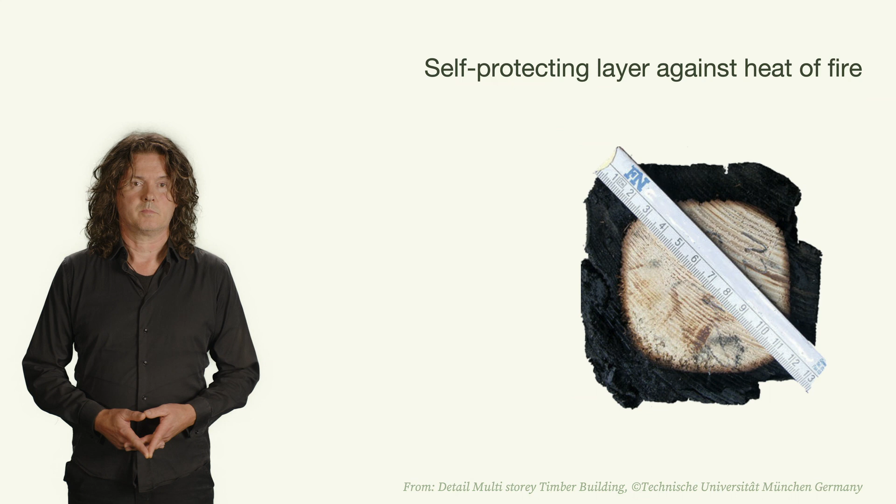Burned timber surfaces had a surprising advantage in the outdoors. In Japan, the method of charring boards called Shou Sugi Ban has been used for centuries to improve the weather resistance of timber facades.

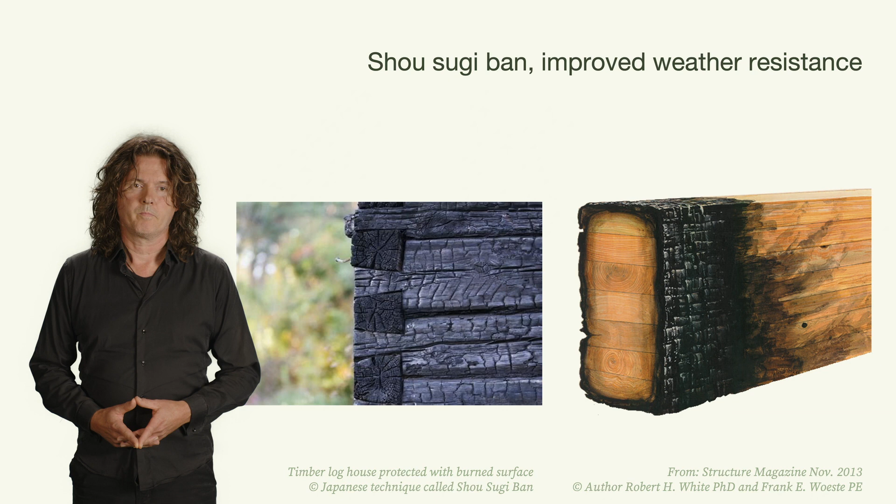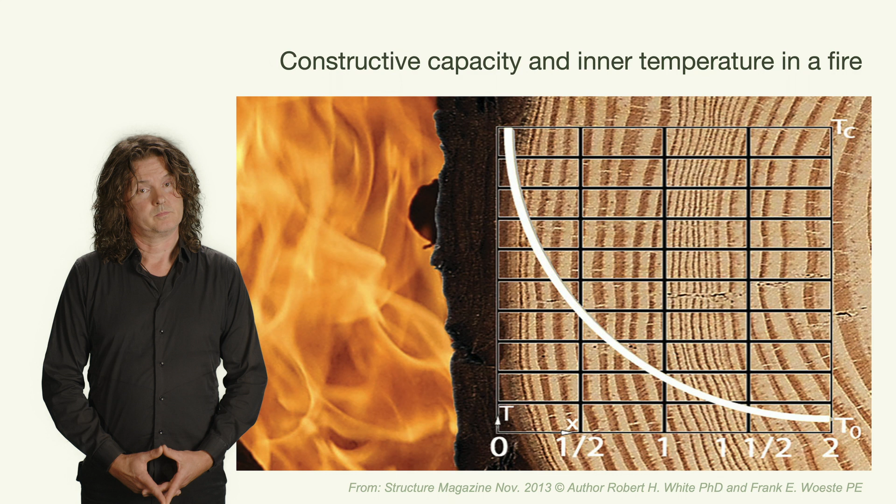In a fire, the layers behind the charred layer retain their constructive capacity completely. The inner temperature of the burning mass timber component remains at a moderate temperature. Mass timber construction systems are very predictable in instances of fire. The burn-in speed of softwood is 0.7 millimeters per minute. So by oversizing a structural beam or floor, a fire resistance of up to 120 minutes can be realized.

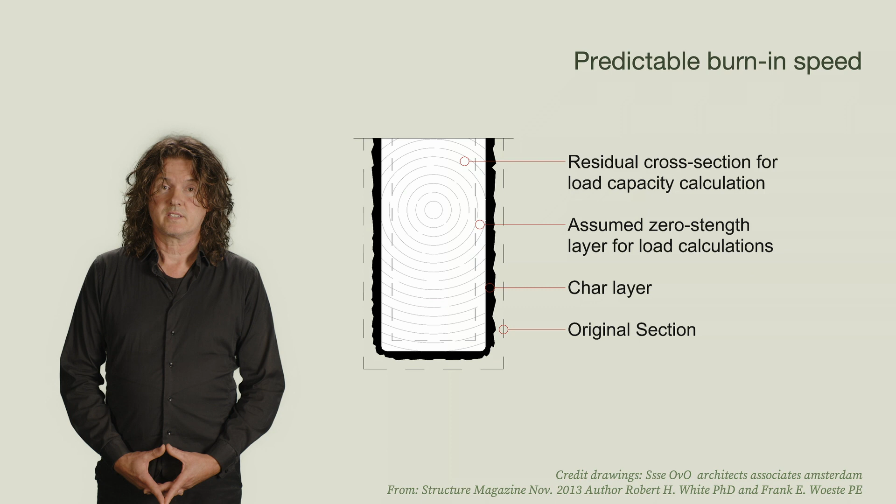In this fire test, various insulation materials were tested. The flame of each burner reached a temperature of over 1,000 degrees on the materials in the mock-up, being a plasterboard underneath the respective 10 centimeter thick insulation materials. From left to right, cellulose, styrofoam, glass wool and rock wool.

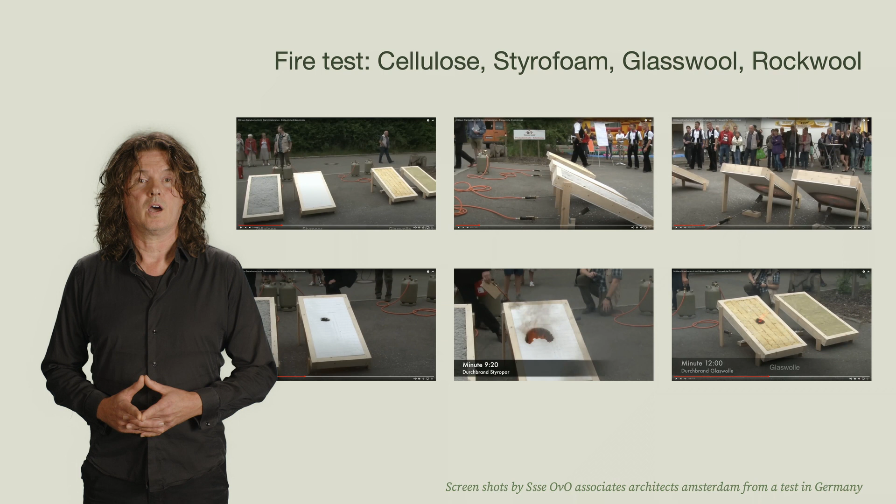For the styrofoam, the burn-through took just 9 minutes and 20 seconds. There was dripping of molten plastic and toxic fumes. With the glass wool, after a total of 12 minutes, the flames pushed through upwards. With rock wool, the burn-through took 18 minutes.

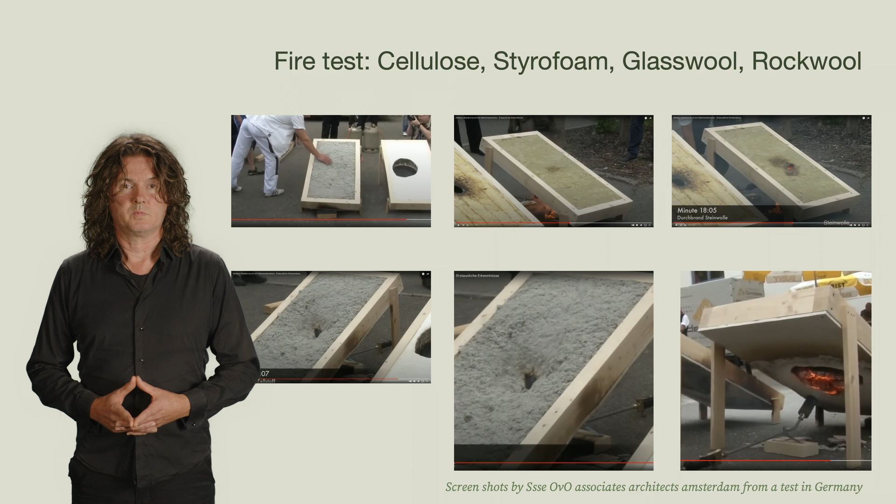Amazingly, after only 25 minutes, you can still touch the cellulose surface without burning your hand, even though the cellulose is hit from below with an open flame of over 1,000 degrees. The flames apparently cannot harm the cellulose material that much. The cellulose actually didn't really burn. It gave way only after 32 minutes.

It took the flames twice as long as with the rock wool and more than 3 times as long as with the styrofoam. It is almost unbelievable that the cellulose insulation material, which is fundamentally made of wood, can resist the flames that long.

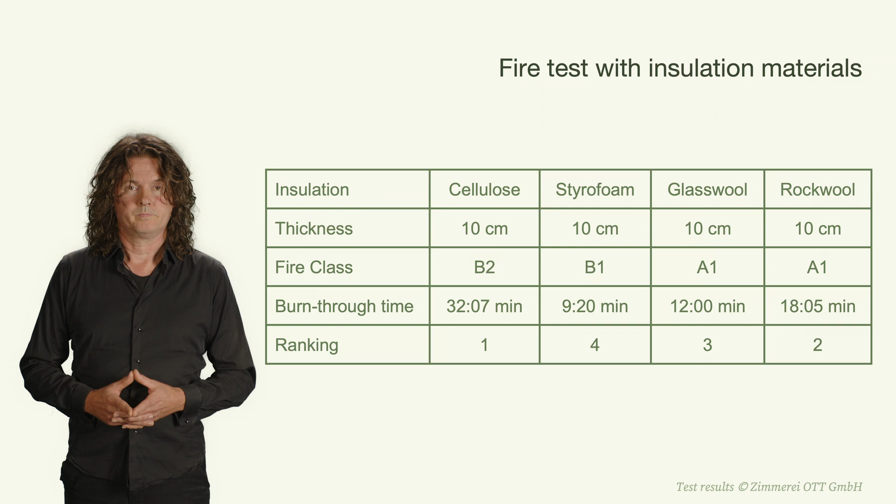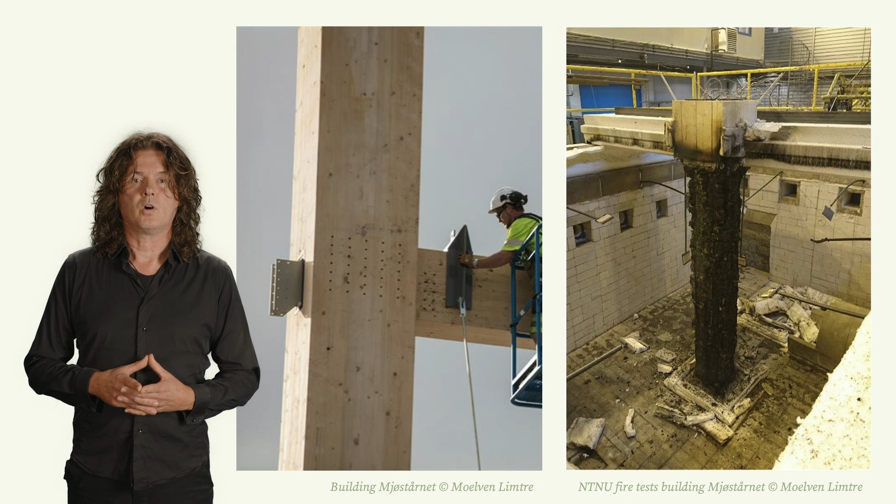Before finalizing the design of the structural parts for the timber tower Mjøstårnet in Norway, real-life fire tests were performed. The rectangular timber columns were subjected to flames coming from all sides in this laboratory furnace. This is what they looked like after the test. Notice that the burned columns ended up in a rounded tree trunk shape.

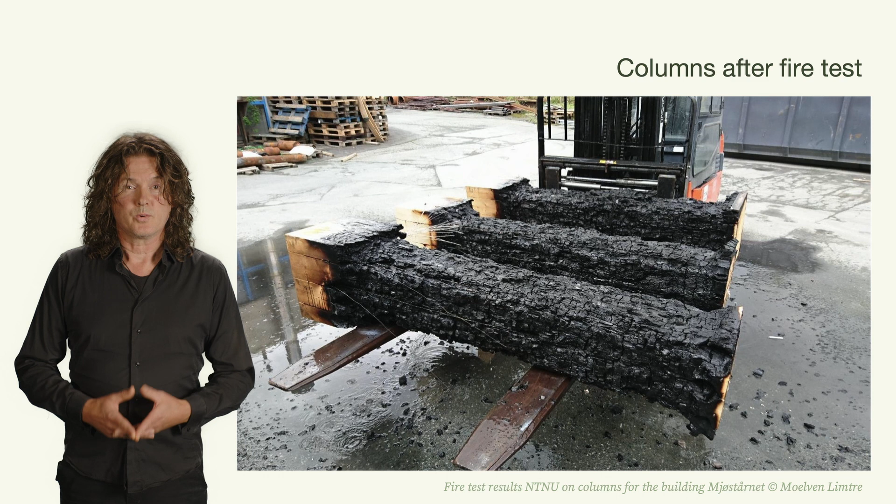Because of this extensive fire testing, the engineers were able to optimize the structural timber columns and beams that were then produced for the building.

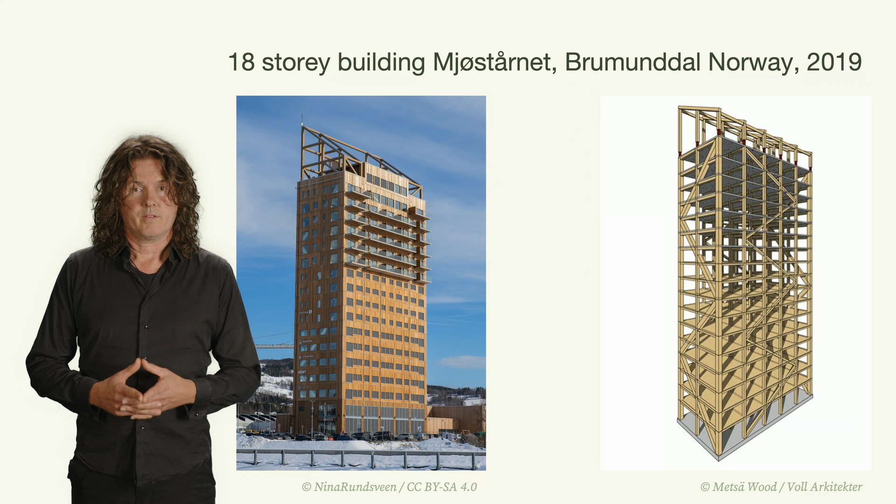Have you ever considered how well timber construction stands up to natural disasters? Let's look at a case study in Uttarkashi district in India, where timber structures have withstood earthquakes for almost 900 years. This is a Koti Banal, a 5-story house built in a region prone to earthquakes. It has a stacked timber log structure, infilled with earth and stone.

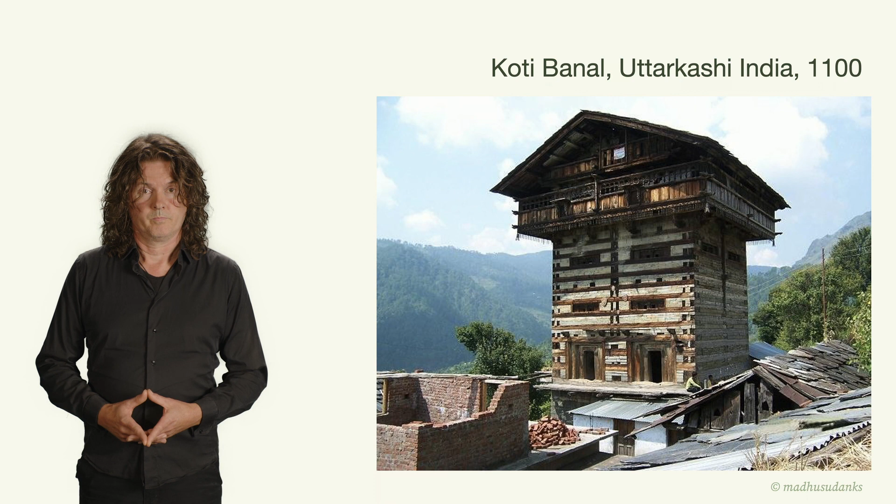Here is a diagram showcasing the horizontal load capacity of Koti Banal buildings, which enables its seismic capacities. It's a visual testimony to the resilience of traditional log construction methods, underscoring their relevance even today.

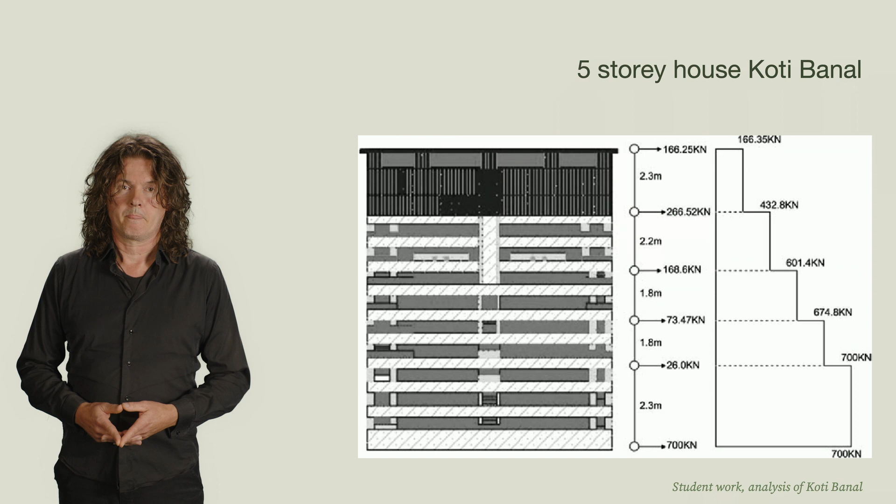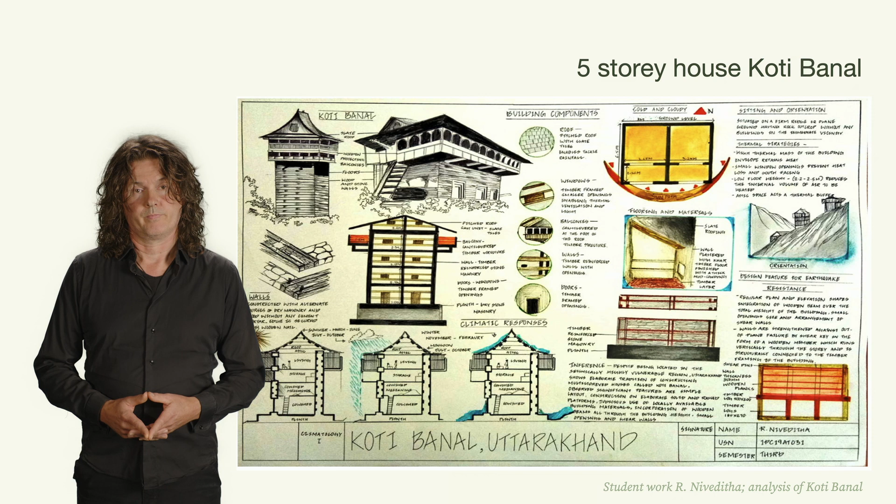Mass timber buildings are light and flexible, and are therefore less likely to collapse and take damage in case of an earthquake. Any damage that does occur is often easily repairable. The mass timber panel construction proves to be very suitable for mid- and high-rise buildings. Here you can see seismic testing on a 1:1 scale mass timber building done on a large shaking table in Ivalsa, Italy.

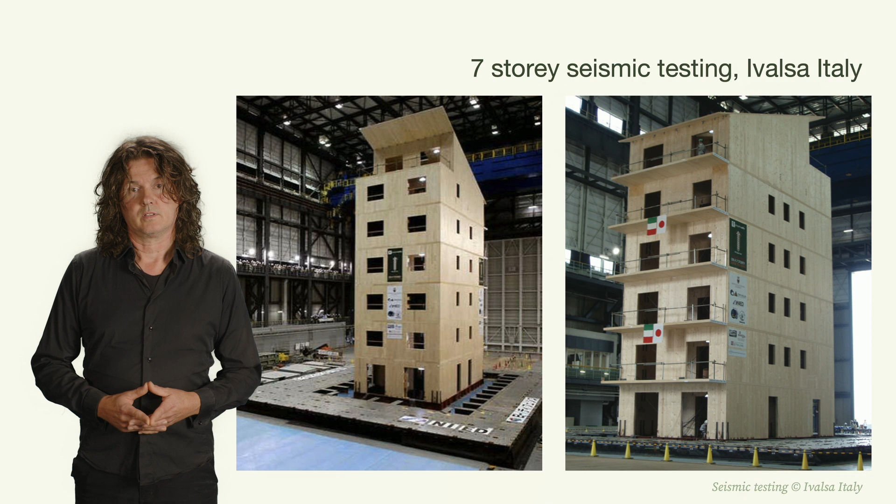In this test on a 10-story structure in San Diego, different mass timber products for floors and walls were tested to compare their performances. The east-west rocking walls are made of CLT, and the north-south rocking walls are made of mass plywood, which is in fact a giant LVL plate, only recently developed in Portland, Oregon.

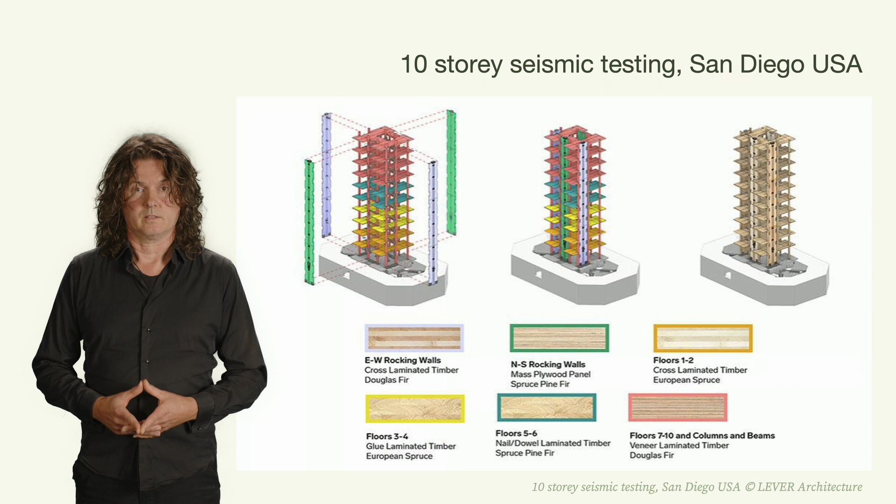Floors 1 to 2 are made of CLT, floors 3 to 4 are made of glulam, floors 5 to 6 are made of NLT-DLT, and floors 7 to 10, columns and beams, are made of LVL. Here you see the 1:1 scale mock-up on the shaking table in San Diego, where the different mass timber products were tested together with fully mounted facades. It is amazing to see the variety in mass timber products that are already available to make earthquake-proof high-rise buildings.